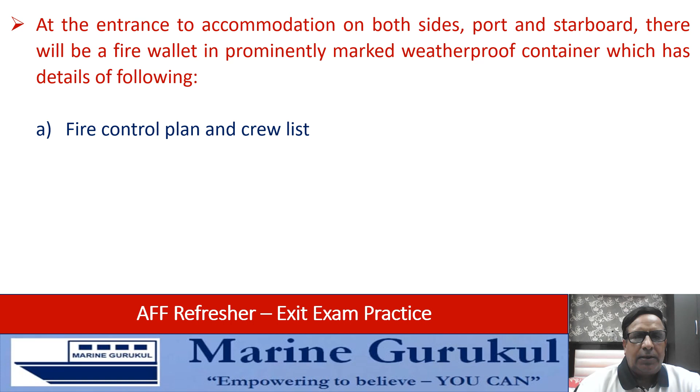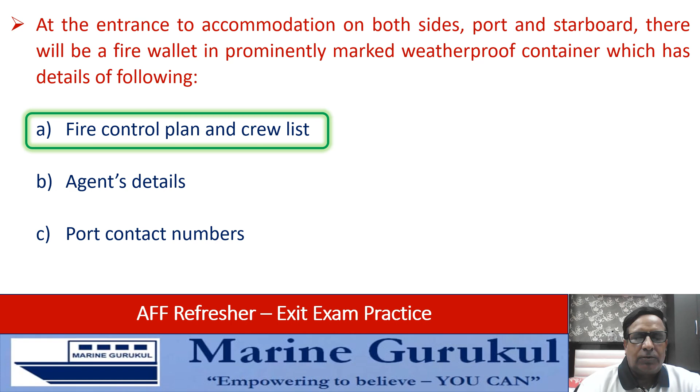At the entrance to the accommodation on both sides, port and starboard, there will be a fire wallet in a prominently marked weatherproof container which has the details of the following: fire control plan and crew list, agents details, port contact numbers. And the right answer is fire control plan and the crew list will be the contents of the fire wallet.

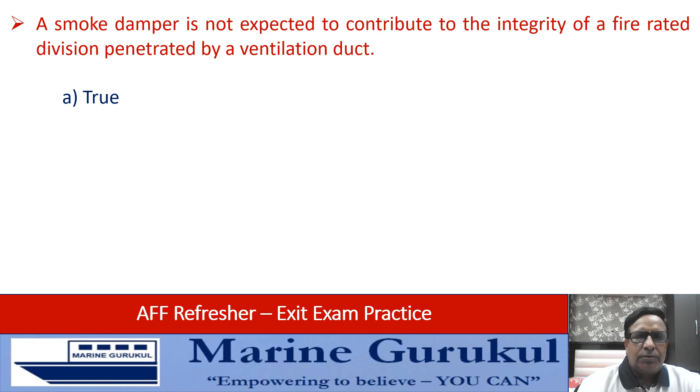A smoke damper is not expected to contribute to the integrity of a fire-rated division penetrated by a ventilation duct. True or false? The answer is true, because a smoke damper does not contribute to the fire integrity of a fire division.

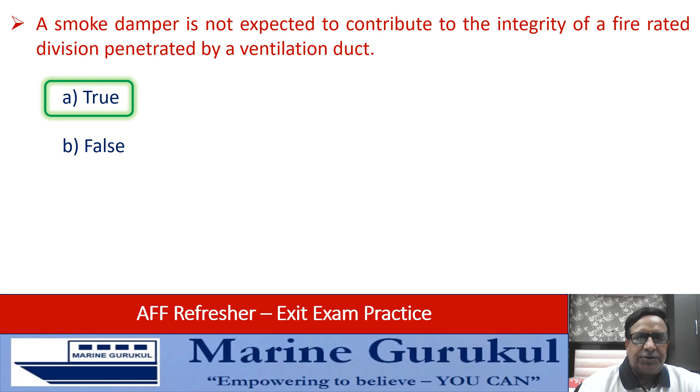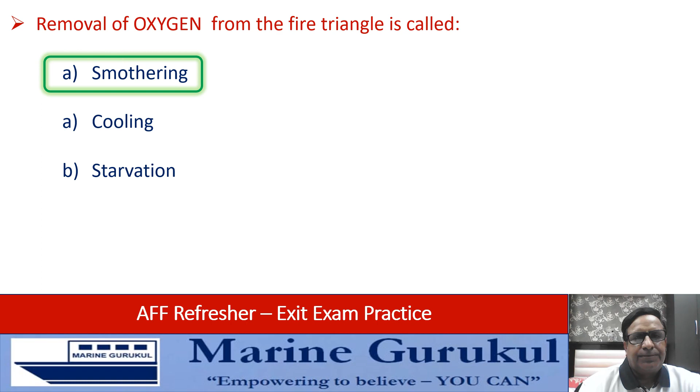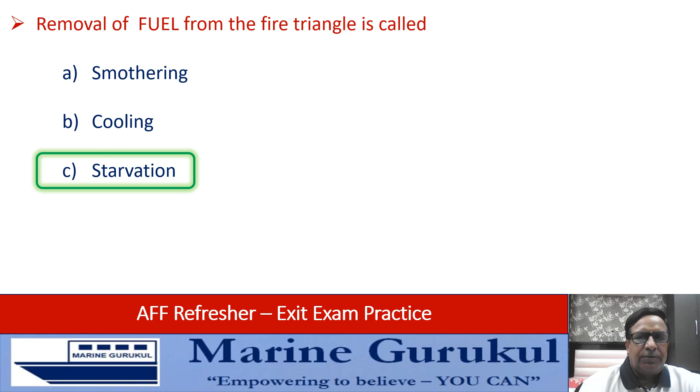Removal of oxygen from the fire triangle is known as smothering, cooling, starvation. I'm sure all of us know the answer. It's smothering. Removal of fuel from the fire triangle is called smothering, cooling, or starvation. The answer obviously is starvation, because you're starving the fire of the fuel.

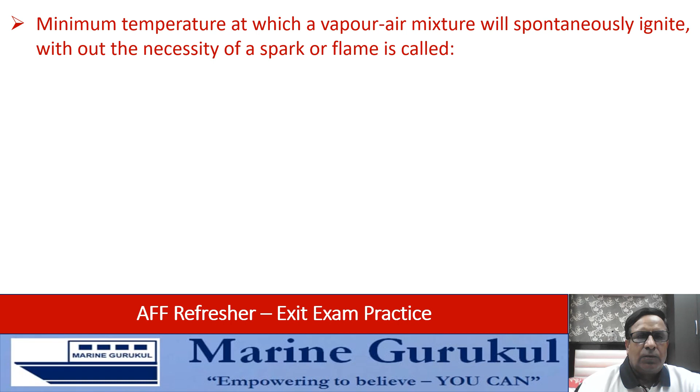Minimum temperature at which a vapor-air mixture will spontaneously ignite without the necessity of a spark or flame is called boiling point, auto ignition. Obviously, the answer is auto ignition.

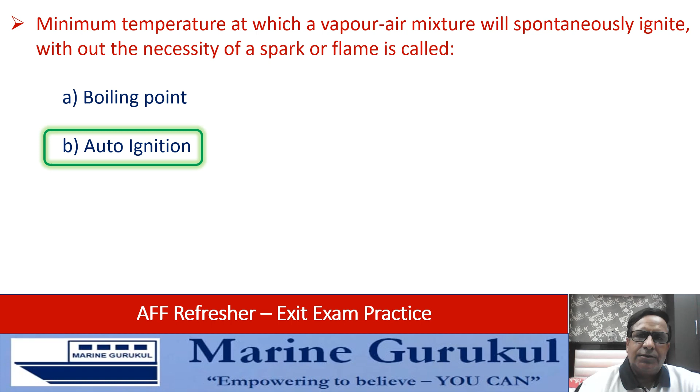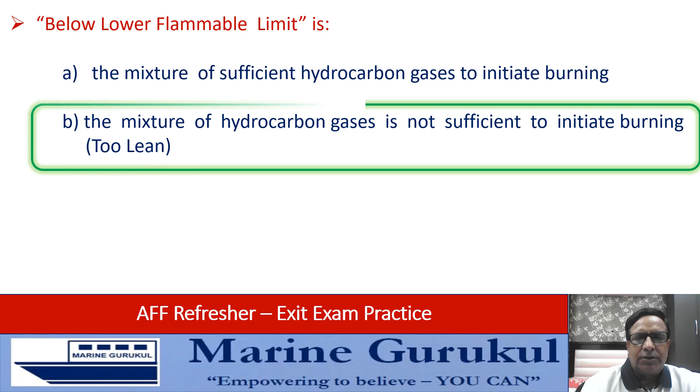When a hydrocarbon air mixture is found to be below lower flammable limit, what does it mean? The mixture has sufficient hydrocarbon gases to initiate burning, or the mixture of hydrocarbon gases is not sufficient to initiate burning. That means the mixture is too lean. Obviously, when the mixture is below lower flammable limit, it's too lean. So the answer is insufficient hydrocarbon gases to initiate burning.

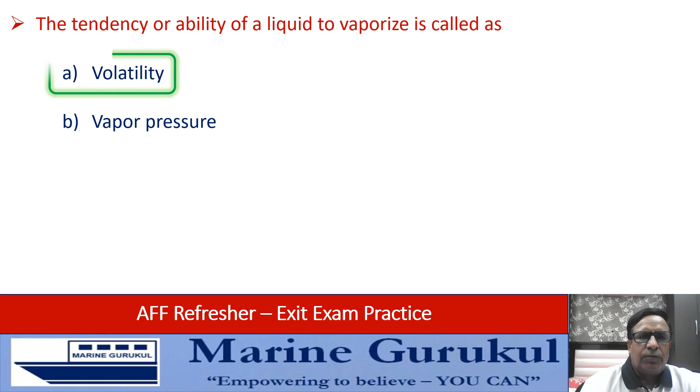The tendency or ability of a liquid to vaporize is called volatility, vapor pressure. The answer is volatility. The most efficient way of transferring heat in liquids and gases is called conduction, convection, radiation. Obviously, in liquids and gases, the most efficient way is convection.

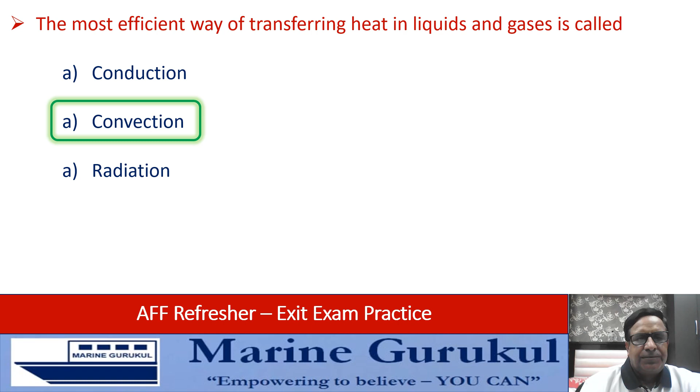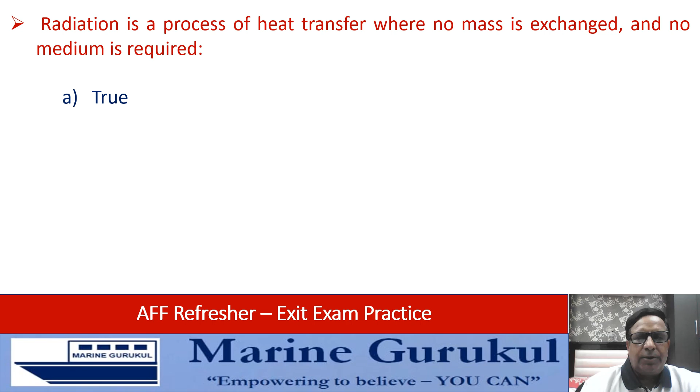Radiation is the process of heat transfer where no mass is exchanged and no medium is required. Is it a true statement or a false? Obviously, it's a true statement. So answer is true.

Fires in combustible metals such as magnesium, titanium, sodium, lithium, and potassium are classified as Class B fire, Class D fire, Class E fire. Obviously, these are metal fires, and metal fires are classed as Class D fires.

As per ISO, fires involving fats such as used deep fried fats are classed as Class B, Class E, Class F. Obviously, fires involving fats are referred to as Class F fire under the ISO classification of fire.

As per National Fire Protection Association (NFPA), fires in cooking appliances that involve combustible cooking mediums such as vegetable or animal oil and fats are classed as Class B, Class E, Class F, or Class K. The answer is Class K.

There are two different standards for classification of fires. One is as per the ISO classification, and the other is as per NFPA classification. So we need to be careful. If the question is pertaining to a specific classification, then we need to be appropriately handling it.

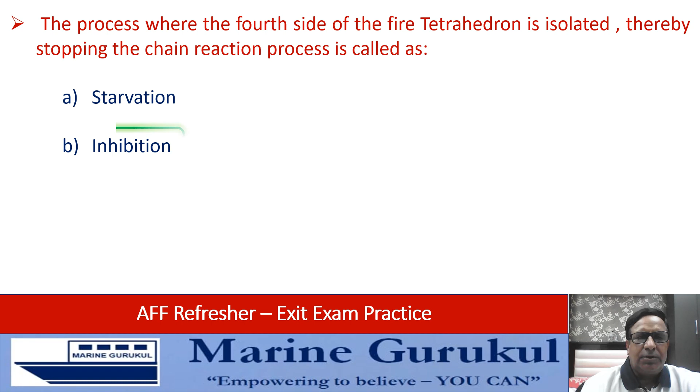The process where the fourth side of the fire tetrahedron is isolated, thereby stopping the chain reaction, is referred to as starvation or inhibition. The process is referred to as inhibition, where the chain reaction is hampered or disrupted, and that is called inhibiting the chemical reaction.

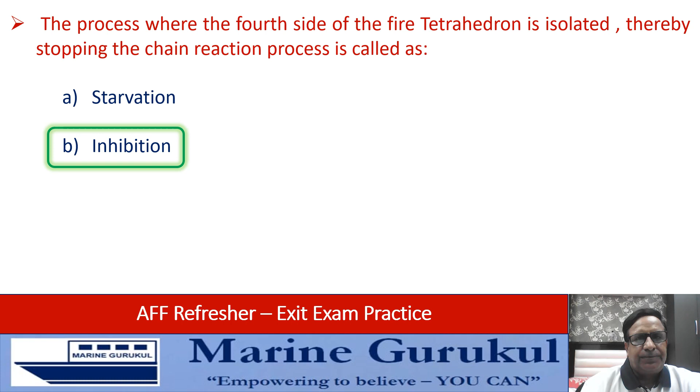In order to achieve the fire safety objectives, the following functional requirements are embodied in the SOLAS regulations. Division of a ship into main horizontal and vertical zones by thermal and structural boundaries. Separation of accommodation spaces from the remainder of the ship by thermal and structural boundaries. Protection of means of escape and access for firefighting. And last is all of the above. Now the functional requirements in SOLAS include all the above, so answer is D.

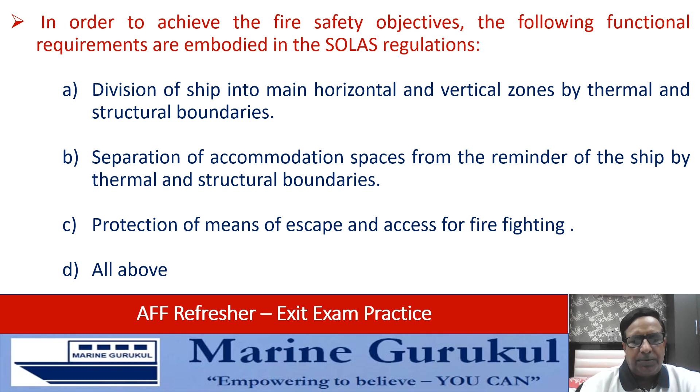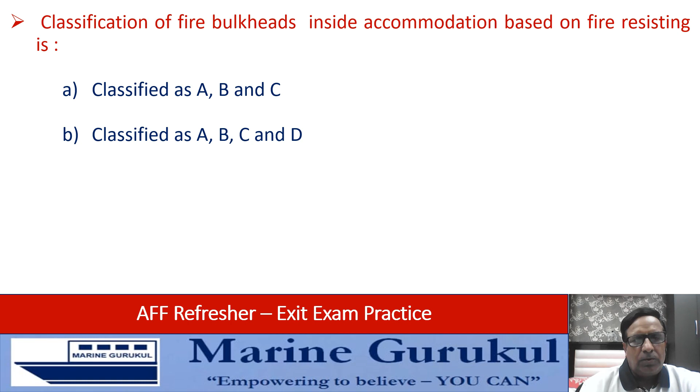Classification of fire bulkheads inside accommodation based on fire resisting is classified as A, B, C type, or class A, B, C, D type, and we know that the classification is limited only to Alpha, Bravo, Charlie, so the answer is A, classified as A, B, and C.

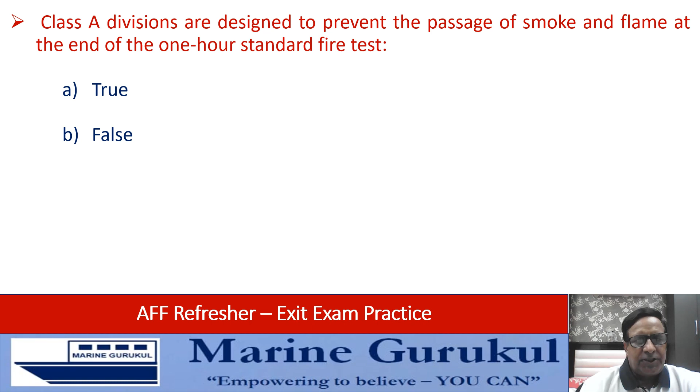Class A divisions are designed to prevent the passage of smoke and flame at the end of the 1 hour standard test. True or false? For Class A divisions, yes, it is a 1 hour test period, and the statement is obviously true.

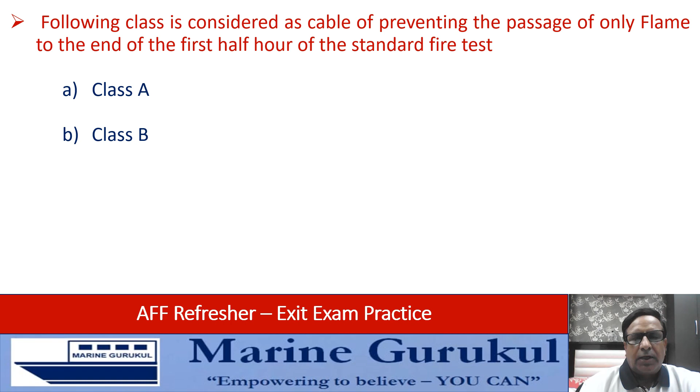The following class is considered capable of preventing the passage of flame only, for the first half hour or 30 minutes of the standard fire test. The type or class of this bulkhead is Class A, Class B, or Class C. These bulkheads are classified as Class B bulkheads.

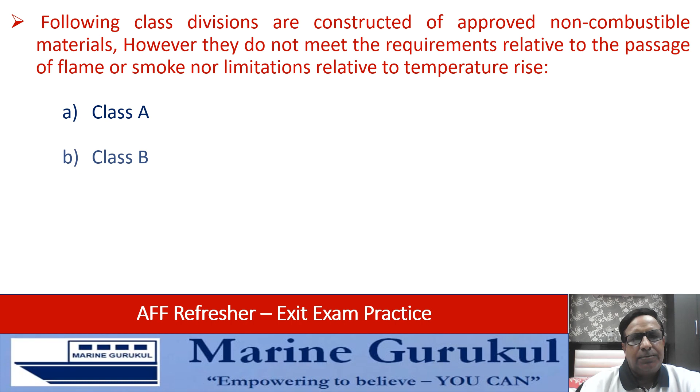The following class divisions are constructed of approved non-combustible materials. However, they do not meet the requirements relative to passage of flame or smoke, nor limitations relative to temperature rise. Which class of bulkhead are these? A, B, or C? This is type C or Class C bulkhead. Fire class C, yeah.

Designated areas of smoking is specified in which document? Red Book, Company's Manual, or SOLAS. Obviously, the smoking areas are designated as per the Company's Manual.

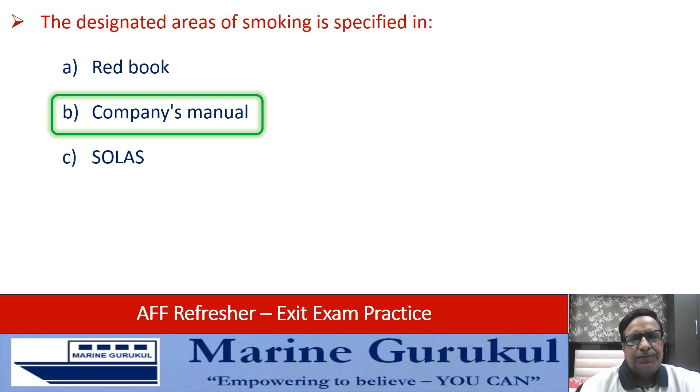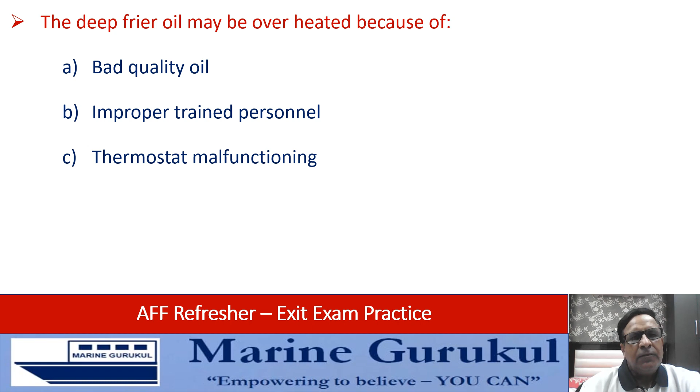The deep fryer oil may be overheated because of which of the following reasons? Bad quality of oil, improperly trained personnel involved in handling it, or thermostat malfunctioning. Obviously, in the deep fryer, if the oil is overheated, the most probable cause could be thermostat malfunctioning.

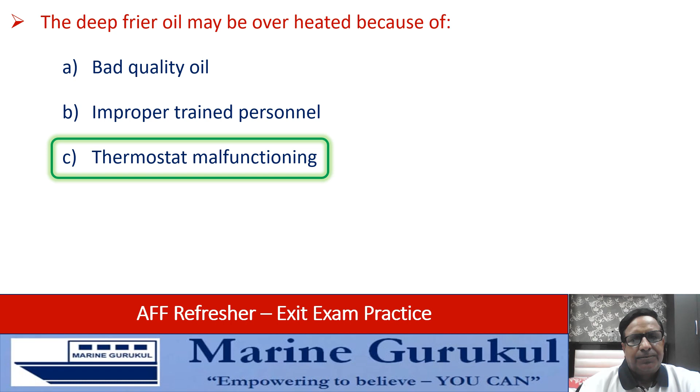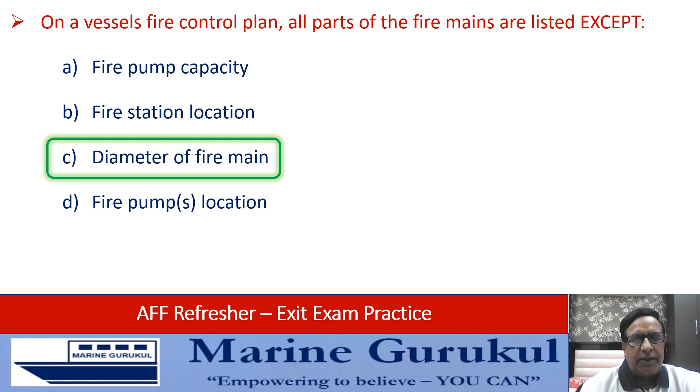On a vessel's fire control plan, all parts of the fire mains are listed except which one of the following. So the question has to be read very carefully. Fire pump capacity, fire station location, diameter of the fire main, and fire pump location. Obviously, all but the diameter of the fire main are part of the fire control plan. So the answer is C.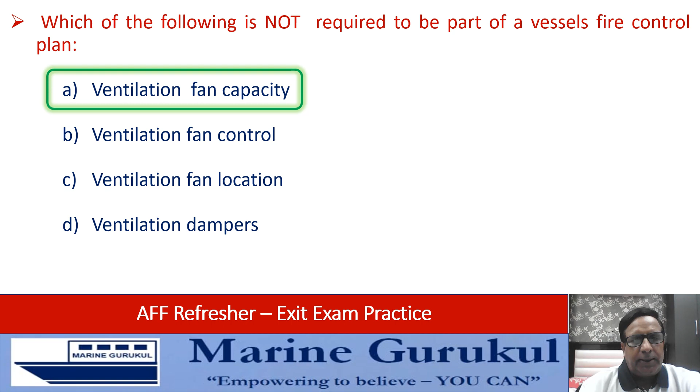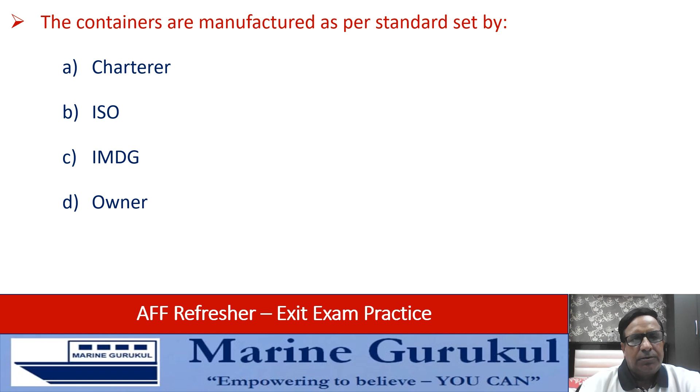The containers are manufactured as per which standards? Charterer standards, ISO, IMDG, or the owner's requirement. The containers are constructed as per the ISO standards.

Flashback arrestors are fitted in deck machinery, acetylene cylinder, or funnel uptake. Obviously, the answer is acetylene cylinders, because you do not want flashback, or the gas flowing back to the cylinder, and therefore you have the flashback arrestors fitted in the acetylene cylinders.

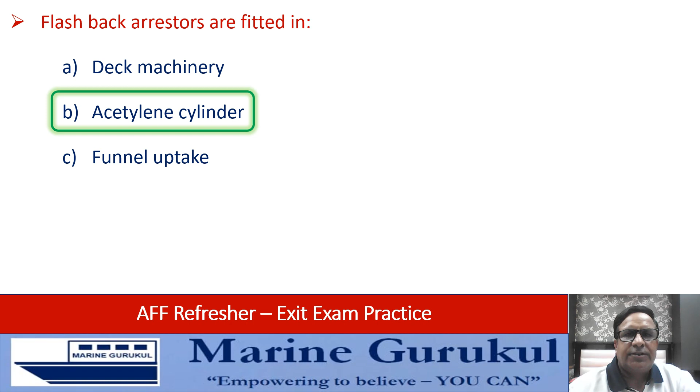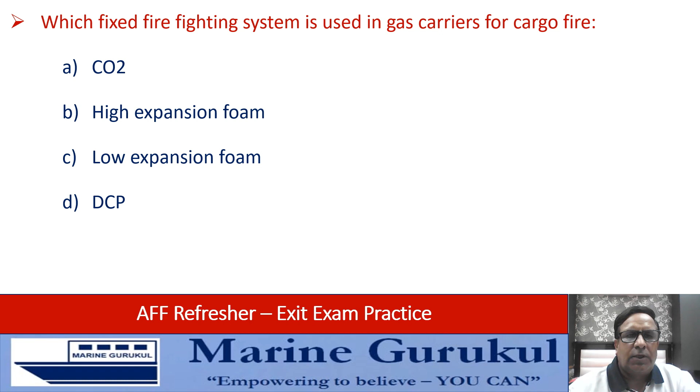Which fixed firefighting system is used in gas carriers for cargo fire? That means for main deck and cargo areas. CO2, high expansion foam, low expansion foam, or DCP. The fixed firefighting system used for cargo areas for gas carriers is dry chemical powder. So the answer is D, that is DCP.

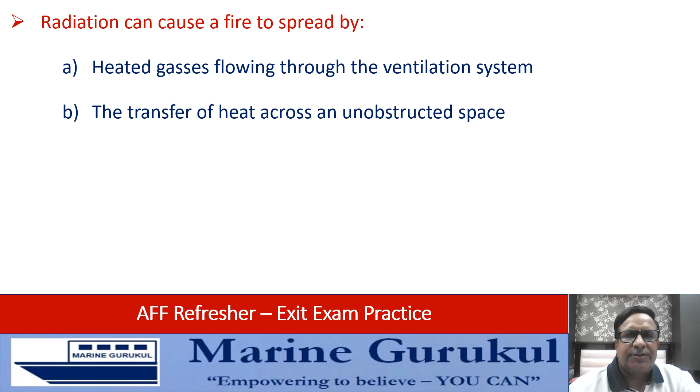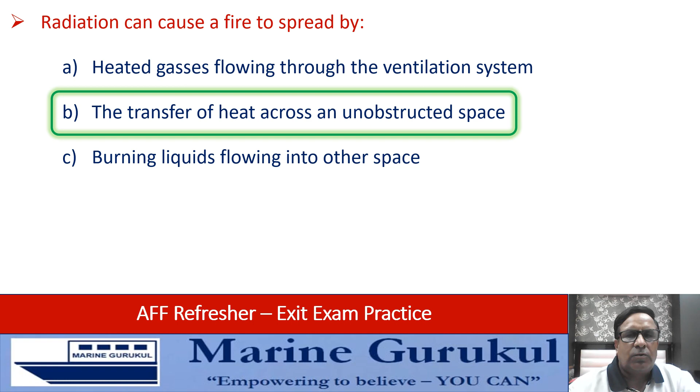Radiation can cause a fire to spread by: heated gases flowing through the ventilation system, the transfer of heat across an unobstructed space, or burning liquids flowing into other spaces. As radiation mode of heat transfer does not require any medium, the transfer of heat across an unobstructed space will be the mode through which the fire spreads because of radiation.

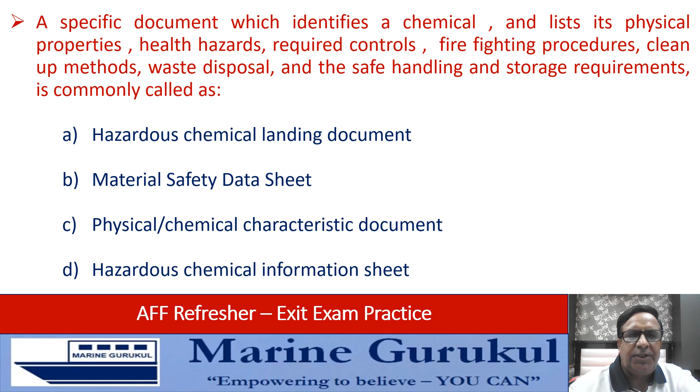A specific document which identifies a chemical and lists its physical properties, health hazards, required controls, firefighting procedures, cleanup methods, waste disposal, and safe handling and storage requirements is commonly called as? Which document contains all this information? Is it hazardous chemical landing document, material safety data sheet (MSDS), physical chemical characteristic document, or hazardous chemical information sheet? The answer obviously is MSDS, that is B, material safety data sheet.

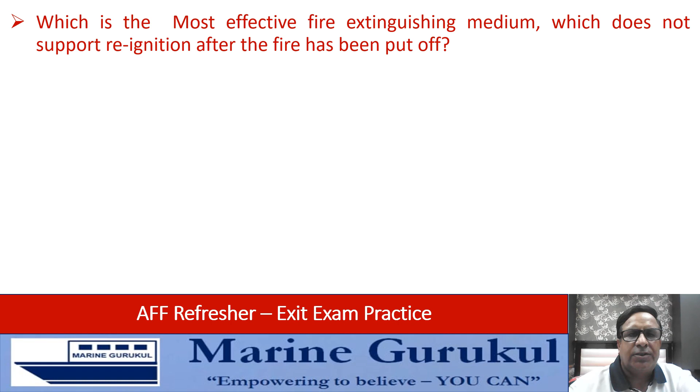Which is the most effective fire extinguishing medium which does not support re-ignition after the fire has been put off? Is it foam, DCP, water, or CO2? The most effective extinguishing medium which does not support re-ignition is foam.

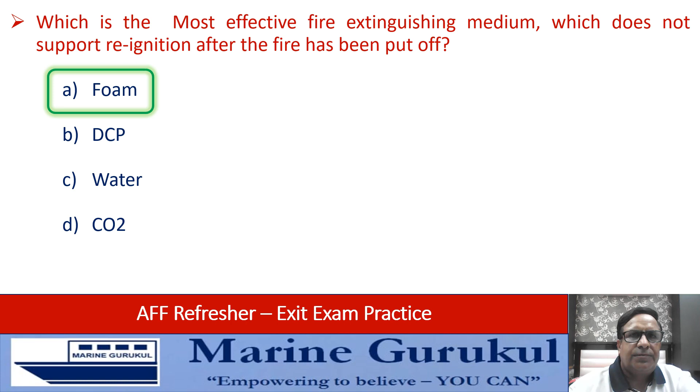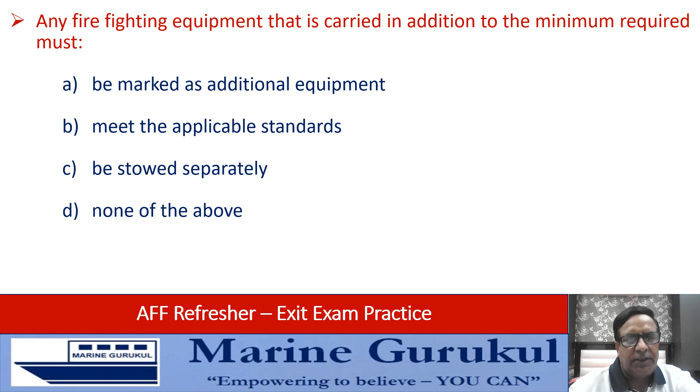Any firefighting equipment that is carried in addition to the minimum required must be marked as additional equipment, meet the applicable standards, be stowed separately, or none of the above. Now, if you are carrying additional equipment over and above the minimum requirement, even then the additional equipment needs to meet all applicable standards. So the answer is B.

So now we come to the end of this particular set of exit exam practice, that is set 1 of AFF Refresher. We'll have a few more sets, so it is recommended that you go through them so that a large number of questions get covered. Wishing you all the best for your exams.